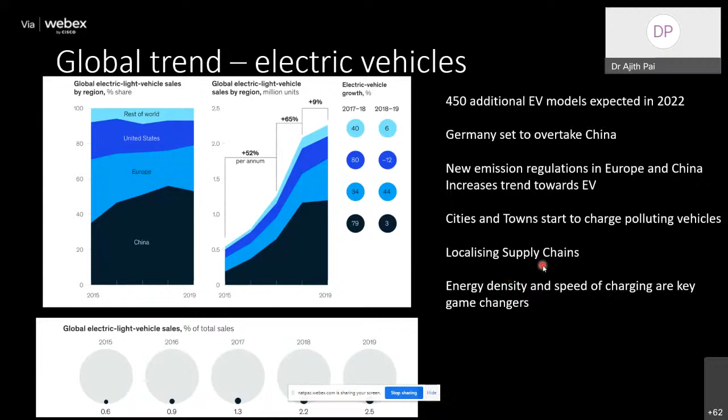And so we have to plan. If you are taking a long journey, then you have to plan where to park the car and where to charge it, and all those things are required. There are solutions offered by the companies for that, but there are some challenges as well, which will be overcome in the future. And energy density is a game changer, which I will show you in the next slide, maybe.

So this is an important slide which I want to show you: why we are bothered about cell energy density. That means the watt hour is the energy capacity of the battery, how much energy it can produce per kilogram of battery. For example, the best here is 300. That means that battery can produce 300 watt hour per kilogram of that battery.

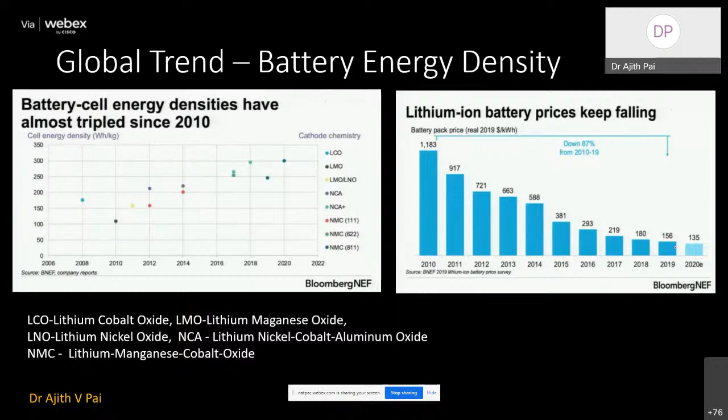Okay. So that is it. I hope you don't have any questions. You can ask questions anytime.

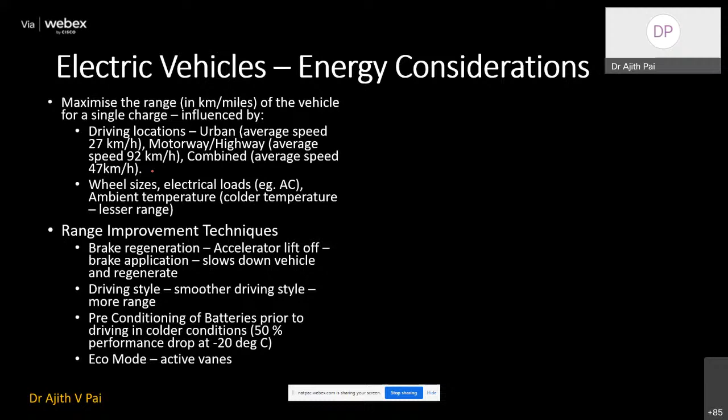And I just want to introduce energy considerations also for this I-Pace. So our objective with the electric vehicle is to maximize the range. That means how many kilometers we can cover with the vehicle on a single charge. So it is influenced by the speed actually. So if you go into city conditions, it could be around 27 kilometers per hour. These are all European conditions actually. And if you go onto the highway, average speed would be 92, and the combined average speed of both would be around 47 kilometers per hour, because we are interested in combined speed.

And then, to represent that, we have a drive cycle which is used. I think in India also we have a similar drive cycle which combines everything. So this drive cycle is nothing but you take the car and test it on a dyno where there are rolling roads available, and you drive the car at different speeds, and this is the time and speed, and you simulate the city condition in this region, around 27 kilometers per hour average, and then motorway or highway. So it is 27 kilometers per hour, 92 kilometers per hour, and the overall average is 47 kilometers per hour. So you have a lot of various accelerations and decelerations involved here, which will simulate the actual vehicle conditions on the real world road. So that is a drive cycle which we have to see.

So generally, when you see a spec of the car, this much fuel economy, maybe 18 kilometers per liter, or some kilometers per liter under standard driving conditions. So they mean this drive cycle. So they drive the car in this standard drive condition at the right temperature and right speed, and then see how much fuel is used by the car. So that is relevant for the electric vehicles as well.

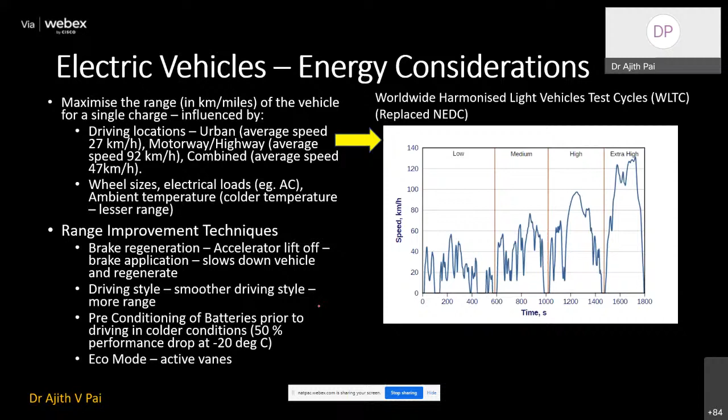So we know brake regeneration. We can lift off the accelerator pedal. That means if you lift off the accelerator pedal, the vehicle will slow down and it will charge the battery. Driving style, a smoother driving style is better, and we can precondition the battery prior to driving. That means we can raise the temperature of the battery even though it is cold outside, and hence it can give more performance. And there are active vanes, which I may not have much time to show, but these are vanes on the front of the car which can close and open based on different speeds. So if the vanes are open, that means more cooling to the motor.

And now we can go to the hybrid electric vehicles. I think we are halfway through the presentation. In the hybrid vehicles, we have 4 types broadly classified: series hybrid, parallel hybrid, series and parallel hybrid, and complex hybrid. So just to make it more illustrative, I will take the picture of this.

Series hybrid means you have an engine here, you have a motor here. So these are 2 actuators to the wheels. So this is wheel actually. The transmission is connected to the wheel, so I would say it is wheel. So here, as you can see, there is no connection between engine and the wheel. It is disconnected, but the motor is connected to the wheel.

So what the engine is doing is it's taking the fuel tank fuel, basically petrol. You might not have seen any diesel hybrid electric vehicles, maybe very less in the market, because diesel as such has good fuel economy. So no incentive to make that into hybrid.

So engine is running. It runs the generator, produces power, and there is a power converter or inverter. It could charge the battery. Engine can charge the battery, and battery can in turn through the power inverter run the electric motor and transmission. So that is the way. So engine is just to charge the battery here.

In terms of parallel hybrid, both engine and electric motor, so this is the engine, this is the motor, both are connected to the wheels. That means engine can use the fuel tank to run the wheel, and also battery can use the electric motor to run the wheel.

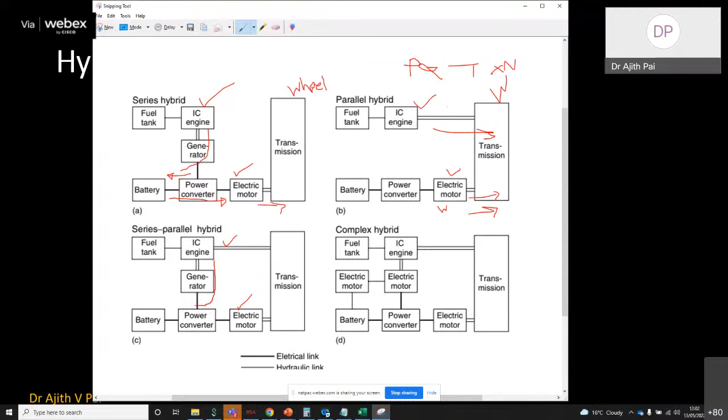In terms of series parallel hybrid, this one, number 3, there is an engine, there is a motor. We are happy with that. In addition to this, it also generates power and gives to battery, so battery is charged by that. Here battery has to be charged purely by external AC means. But here the engine will charge the battery while running the car, which is more good.

So it also will have a plug-in hybrid. Plug may be there, but the engine will charge the battery, and electric motor will be operated by the battery, and then we get the same function as the parallel hybrid. This is more complex. Here it can move into a generator and electric motor mode, which I'm not going into more details. So we are more interested in this series parallel hybrid vehicle in this presentation.

So how it can be applied to hydrogen fuel cell: if you simply remove this IC engine and put a fuel cell there, it becomes a fuel cell vehicle. So it is directly applicable to the fuel cell. So I'm trying to form a groundwork here for the fuel cell.

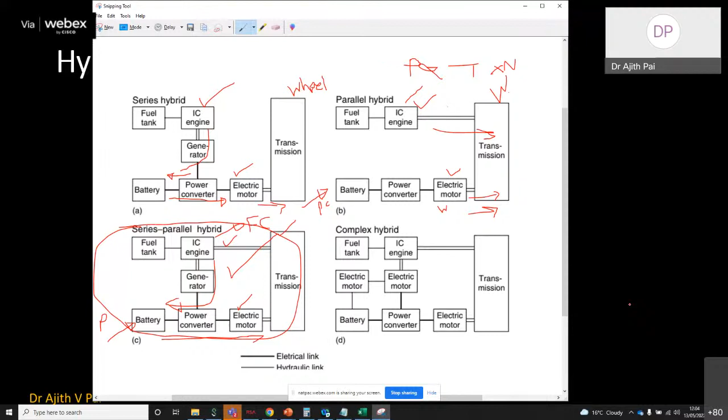So this is a series parallel hybrid vehicle. Fuel tank gives power to the engine. Engine gives power to the mechanical coupling. Then we have a battery and battery charger. We can charge the battery from external plug points. Battery will run the motor controller, and through the motor it can give the power to the mechanical coupling and then to the wheels. And also engine can charge the battery using mechanical coupling.

Engine can charge the battery using mechanical coupling and motor. While charging the battery, it goes through the motor controller and then to the battery. So there are complex mechanisms happening. That means there are different modes of operation. There could be engine only mode: engine alone can drive the car. There could be electric only mode: motor alone can drive the car, in a low emission zone maybe.

There could be combined: engine power is not sufficient, or motor power is not sufficient, then they both work together to drive the car. And there could be engine charging the battery mode, so engine is driving the wheel plus it is charging the battery. So that could be another mode.

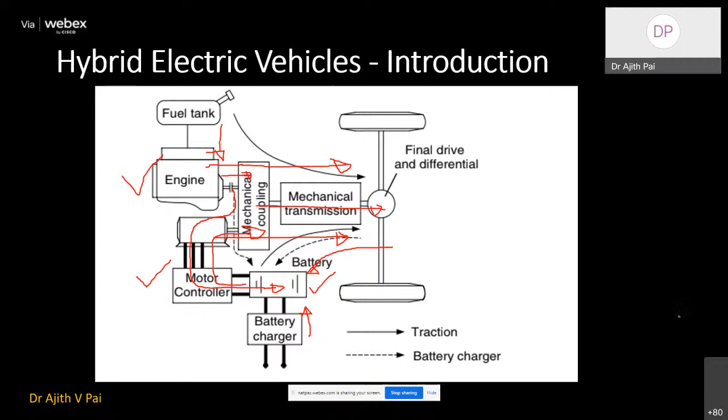There could be another mode where, when you drive the car at a high speed and then remove the accelerator pedal, the wheel will be driving the car. At that time, the battery will be charged using the motor again. So there are several modes of operation, which makes it more complex. We have to coordinate different actuators, which is the engine, motor, and then we have a battery to look into. So it involves more complex logic control algorithms.

So I think we have gone through this. I will just go through this briefly. This is a Range Rover Sport where we have electric motors in both axles, but the engine also is there. This one is the engine and motor on the axles. Here we have the engine in the front, and it drives an orange wire, if you remember, at a high voltage, 400 volt. It can drive the motor at the rear. So this is in Range Rover Evoque and Discovery Sport.

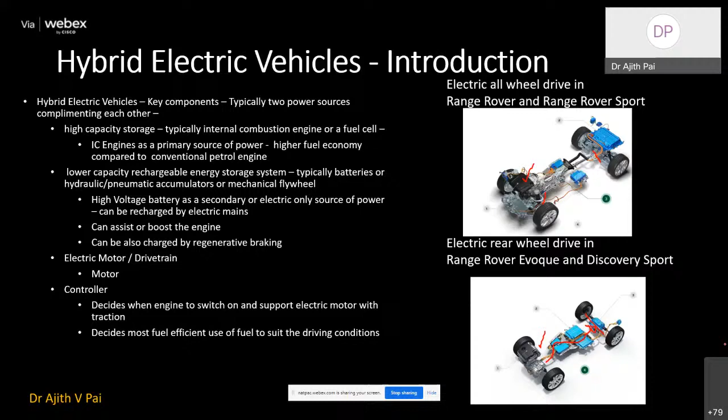So this is a mild hybrid electric vehicle, which is not a plug-in hybrid electric vehicle. That means you have a very small 48-volt lithium-ion battery, very small capacity, and it can do some sort of assist. It can start and stop. Such small things it can do, but it's not a major hybrid architecture.

Then we have a plug-in hybrid electric vehicle. So now the battery capacity is increased to 13 kilowatt hour compared to the mild hybrid. If you remember, for the electric vehicle, it was 100 kilowatt hour. So it is quite high. With 13 kilowatt hour, you can drive maybe for 30 miles just with the battery. So that means it has to have an engine, and they will both work for better traction and all the things which we have said before.

I hope no questions.

So I'm slowly moving into energy management now, because everything is energy, and energy management is the key feature where the why we are doing hybrid electrification is coming into picture. That means we just don't want to do extra work, because we have a lot of engineers working just by putting battery and motor in a vehicle. IC engines have worked for many years without any problem. The industry is mature. Then why are we doing this disruption of electrification?

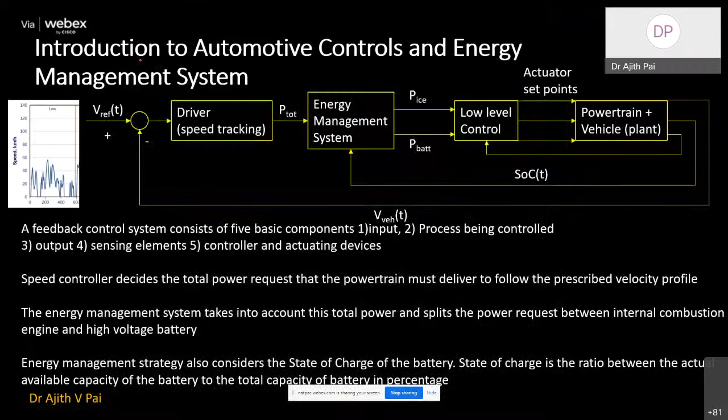So we have an energy management system, and we have only one throttle pedal from the driver here, only one throttle pedal, accelerator pedal. But then it gives a demand to the energy management system. Look, to meet this speed of the vehicle, don't worry about all this subscript. This is just the speed of the vehicle. To meet this speed of the vehicle, I need this much power. There is a calculation available here.

And what the energy management does is it takes the total power required and splits it into two. Okay, you the IC engine, you give this much power, and the battery, you give this much power. So it splits into two. So that is the main function of the energy management system. And then you have a low level controller which will take this power and then say to different actuators such as the engine or a motor to deliver that, and it will have a continuous feedback.

So the vehicle is moving forward, it will feed back the speed here, actual speed, and this is the required speed, and it will find the error and it will correct the driver power demand, and energy management will recalculate. So this is the basic traction activity of the car.

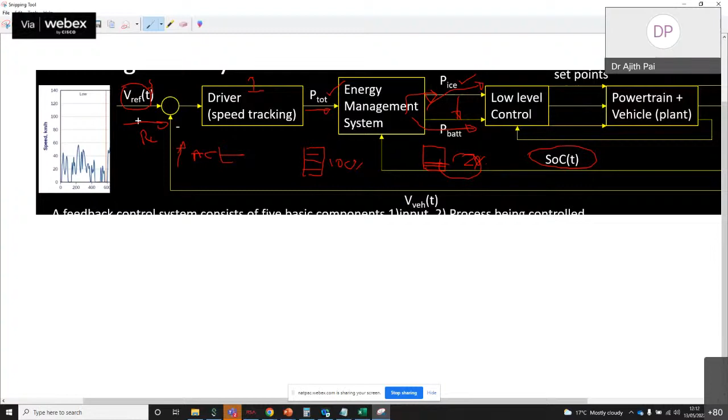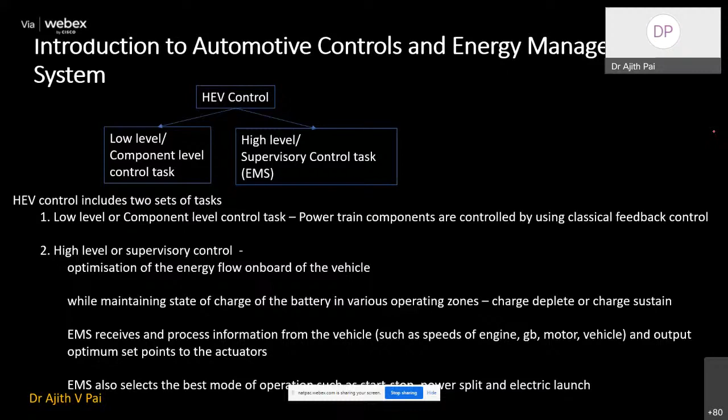So it is a clever logic. It does all this arbitration. Any questions on this? Okay, so I hope this basic control structure is clear. And then if I go, let me see what to say about this optimization. Yeah, I think I can skip this slide because we are nearing the end. So I will show this quickly.

So energy management, what it does is it will use a cost function. That means this is the fuel economy curve, and it will find the smallest fuel economy point for the car, and it will ask the power from the engine based on the smallest fuel economy point from the current calculation, and it will ask power from the engine and also from the battery. So there is a cost function here, and the goal is to reduce the cost function.

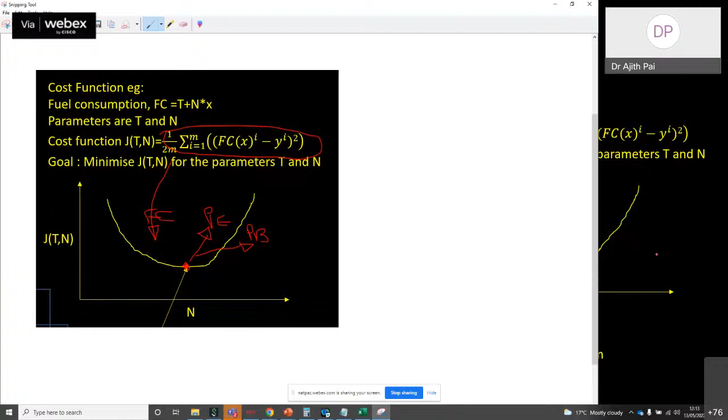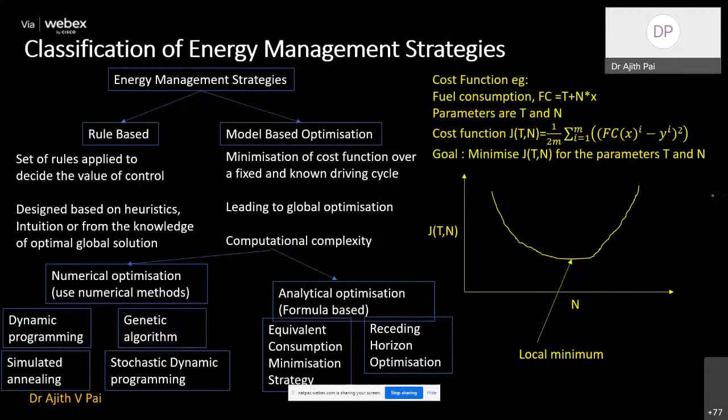So I won't go into more technical details. So these are all different types of energy management, and we have rule-based and model-based optimization. What we do is basically combine both and deliver to reduce the fuel consumption. Then I will skip this one. Yeah. So energy management, I will show in a different picture here.

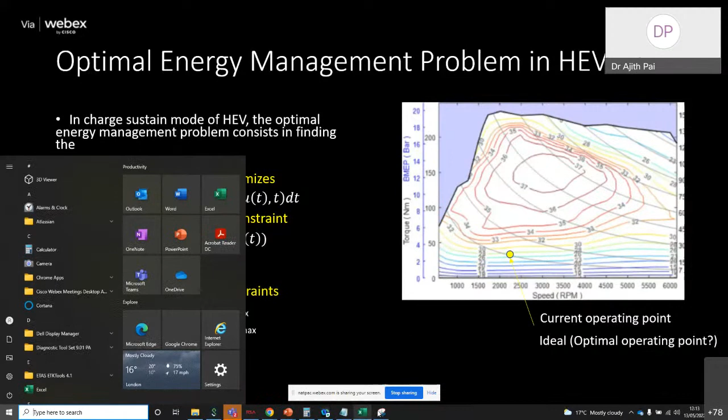So while doing the energy management, what it does is it will have constraints. That means for the current time, it will see how much power the battery can provide, whether it is within the limits, and how much power the engine can provide. It will see it has limits. It can't be exceeded, and also it will see the state of charge of the battery.

If the state of charge of the battery is high, it can ask for more power from the battery. If the state of charge is low, it can ask for more power from the engine. So that is the consideration energy management will do. And then at the end, it will see how much fuel consumption can be reduced by combining these two. I can give you more illustration here.

So what energy management does is it will calculate the equivalent fuel energy at a given point of time by adding the fuel required to drive the car, and also it will consider how much electric energy is required to drive the car. But electric energy we cannot directly convert into equivalent fuel energy. There is a conversion factor required.

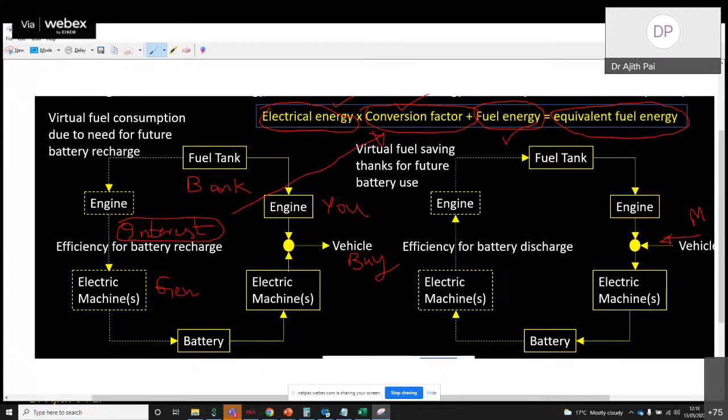So that means if you use the electric machines to drive the car and to charge the battery back, you need to spend some extra money, extra energy, to do the equivalent calculation. So for the hybrid vehicle, we have to consider the fuel energy and also electric energy and the conversion factor to get the equivalent energy. And the energy management tries to reduce the equivalent fuel energy at any point of time.

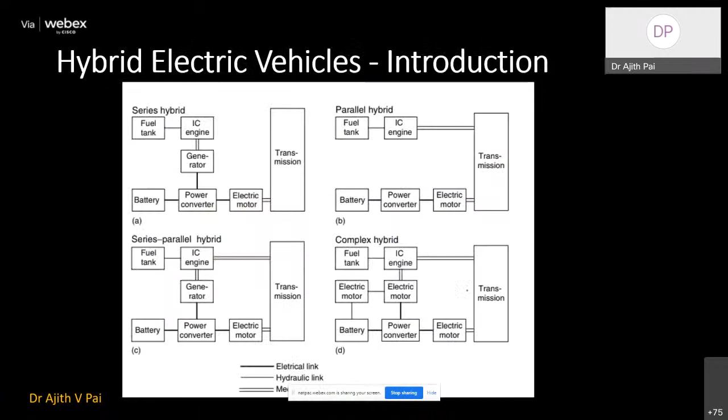So I think our time is coming to an end. I've quickly gone through the slides just to reduce the complexity. But if there is one slide you have to remember, maybe this is the one, with different levels of electrification and different architectures which we have shown before. So that's all from my side.

We have seen types of power sources: IC engine, mild hybrid, plug-in electric vehicles, electric vehicles, and fuel cell electric vehicles. Energy consideration: we have seen that for EVs, energy range is important. For hybrid electric vehicles range is not so important, but we need to reduce the fuel consumption. Importance of energy management: to split the driver's power into different actuators and at the same time reduce the fuel consumption.

Classification of EMS control we have briefly gone through, and the issues in implementing EMS we have seen briefly. And we have seen an introduction to ECMS, which is equivalent consumption minimization strategy. That means the equivalent consumption of the fuel, and minimizing that using an electric energy management strategy.

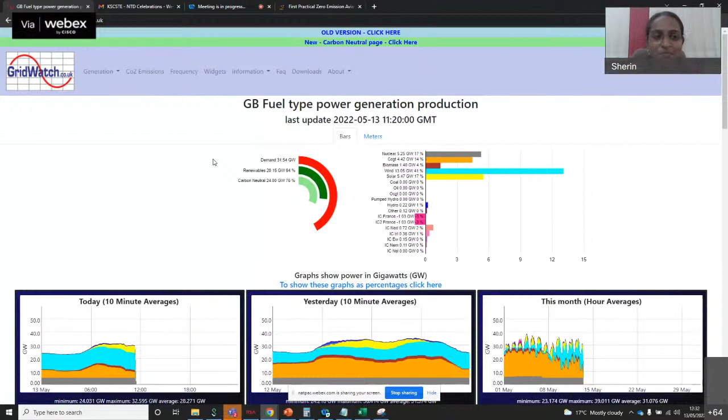Okay, thank you. Any other questions? I think there are no more questions. So can we wind up, sir? Yes, thank you.

Thank you for taking us through an interesting journey on hybrid vehicles, and for introducing the concepts of energy management very gently and in a very simple manner. Unlike many other speakers, you took the pains of taking an Excel sheet, entering data and showing the real graphs and how they differ, and using a blackboard to show what each point in the graph signifies.